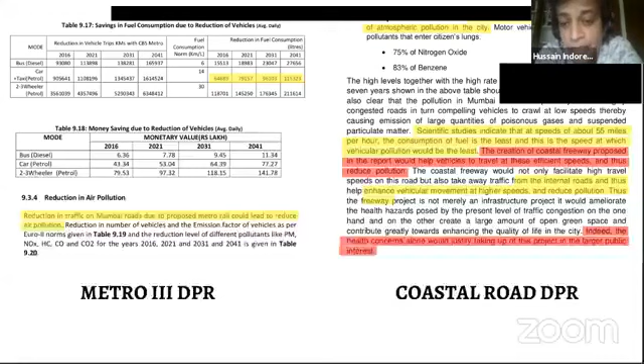Now, this is a very interesting comparison between two projects and their detailed project reports. The Metro 3 had a DPR and the Coastal Road had a DPR, and both were justified in terms of reducing pollution, but they had interesting differences.

The Metro project report claimed the Metro would reduce the number of cars on the road and therefore reduce air pollution. The Coastal Road DPR, on the other hand, said it would help cars move faster and therefore reduce pollution. In a sense, these are at cross purposes, because if the objective is to reduce cars, why would you want them to go faster?

Well, the truth of the matter is neither the metro nor the coastal road is actually going to affect car use very much. In fact, one reason metros have broad acceptance is because they do not affect the demand for cars or the use of cars. And if you think about it, that actually makes sense.

If you build a metro on an arterial road, there will be people who will move to the metro, but it will also clear up more road space for cars, which means that over time, the road space that is released will be taken over by car users, who will increase over time. So the metro doesn't necessarily reduce car use. In the short term, maybe it does, but in the long term, it does not.

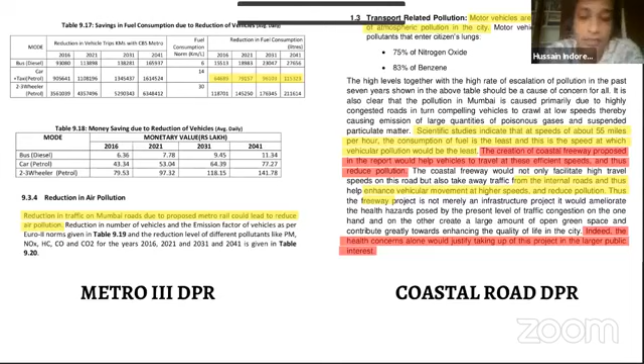The coastal road obviously has nothing to do with reducing car use. In fact, it induces traffic. But of course, official justifications are always made in a manner that suits the project proponents, and this is what they were doing in both of these.

So, just a little bit of an outline of the history of the metro system. Till the 1850s, was what we call the pre-mechanization era, where predominantly the mode of transport was walking or animal-based transport. If you think about cities at that time, they were fairly small. City form and city size was to a large extent an outcome of the main modes of transport that people used.

Between 1850 and 1920, new technologies started emerging, such as steam engine, rail, tram, bicycle, and this was just before the pneumatic tire was invented. So when you had to move heavy vehicles, rails were the best way of doing that, leading to the best or most comfortable mode of transport, because wheeled traffic would not be so comfortable.

Between 1920 and 1950 was what's called the metro, bus and car era, where you had the rise of these three modes of transport. Pneumatic tires came in, and these vehicles became much more comfortable, so buses and cars started growing in number. But at this point, metros were a little more comfortable and convenient compared to cars, which were not yet as comfortable as they are today.

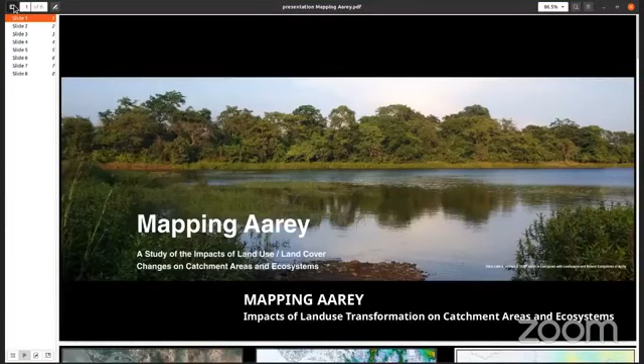Today's presentation is titled 'Towards an Ecological Planning Approach: Mapping Aarey for Conservation.' I'll be presenting a mapping report of Aarey which we did last year, undertaken as part of the KRVIA Research and Design Cell.

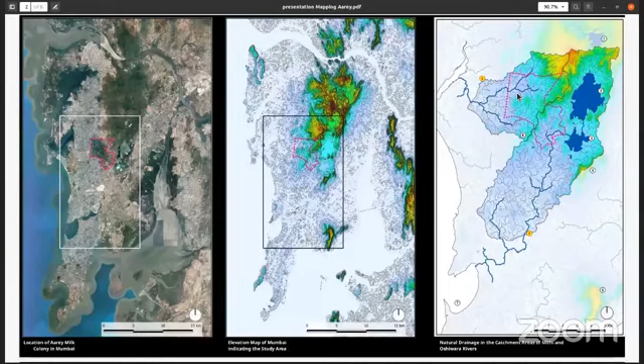These protected areas are either part of the national park or were earlier part of the NDZ, which Aarey was a part of. Aarey has therefore remained a low development zone with extensive forest cover and open areas, providing a sizable permeable area for rainwater infiltration and groundwater recharge. The 2018 land cover map shows some fragmentation of forest and natural vegetation in Aarey and surrounding areas; however, much of the vegetation and natural cover is still intact.

Opening up Aarey to a similar built-up intensity as the remaining catchment areas will impact both its ecological and biodiversity values and the various ecosystem services it provides for the city.

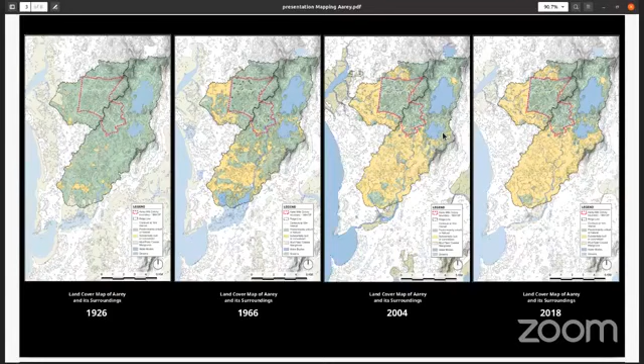Several experts have identified the ecological significance of Aarey and the various ecological services it provides. Experts have identified various habitats in the Aarey colony area, including scrub forest, seasonal freshwater marshes, hillocks with different degrees of vegetation cover, rocky outcrops, grassland, and scrub, which sustain diverse flora and fauna and make the area significant for its biodiversity.

This area is also contiguous with and serves as a buffer zone for the protected area of the Sanjay Gandhi National Park. The vegetation of Aarey, being contiguous with that of the national park, is also similar in composition.

Another important aspect contributing to its ecological significance is the ecological service of groundwater percolation that this area provides, which is important in catchments with natural vegetation cover. The Pranab Sen report recommends maintenance of geohydrological features which channelize rainwater to underground sources. Typically, in these catchment areas, 30 to 35% of water percolates into the ground and contributes to subsurface flow. The Madhav Chitale Committee report on the Mumbai floods also pointed out that soil type, vegetation cover, topographical features, and physical surface in the catchment play a key role in influencing runoff process.

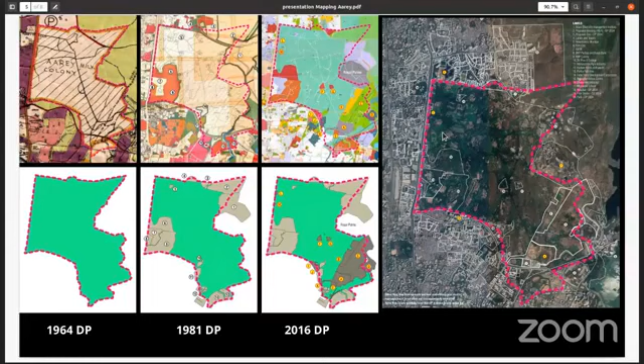It shows specific reservations such as the metro car shed, zoo, and rehabilitation and resettlement housing in the Mithi River catchment. These proposed reservations will involve substantial construction and concretization of land, increasing the volume of surface water runoff and reducing groundwater percolation. The map shows that many of these areas are still predominantly natural or unbuilt.

The recent draft notification now indicates that about 800 acres of Aarey has been proposed to be designated as a reserve forest. However, it is not clear whether the rehabilitation housing plot has been included or excluded from this notification. We should wait for the government to publish the maps to know for sure how exactly the CTS plots have been subdivided and which areas have been included in or excluded from the reserve forest designation.

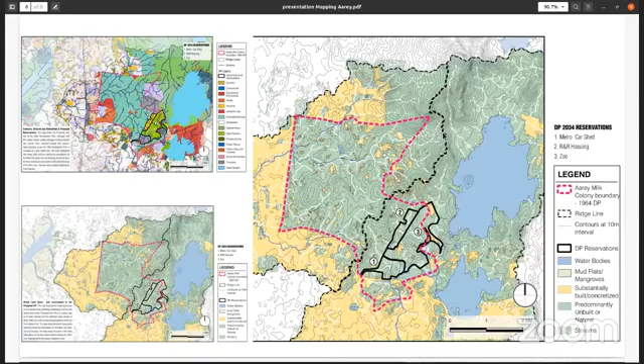This slide shows the concretization of catchment areas and how this will increase surface runoff, resulting in increased stream energy and risk of flooding in downstream areas. Some maps show areas that were flood prone and got flooded in earlier floods, downstream areas in the Mithi and Dahisar river catchments. The rivers in Mumbai also flow over a short distance from hilly terrain almost directly to the tidal region, which increases the possibility of flash floods.

The Pranab Sen committee report states that relatively minor disturbances near the origin of the river may result in enhanced erosion rates, fluctuations in hydrological regimes downstream, silt accumulation rates, and flooding in lowlands and natural recharge systems, all of which can result in serious ecological damage in surrounding areas.

Therefore, one needs to understand that there is a contiguity between ecological systems, and the impacts of development are not just felt locally, but also in other areas. So it's not just administrative boundaries that are important.

There was also another expert committee report to the Supreme Court in the case of MMRDA versus Jal Biradari and others. This also refers to how these comparatively steeper areas in the upper stretches of the river see sudden discharge of water downstream, making those areas prone to floods.

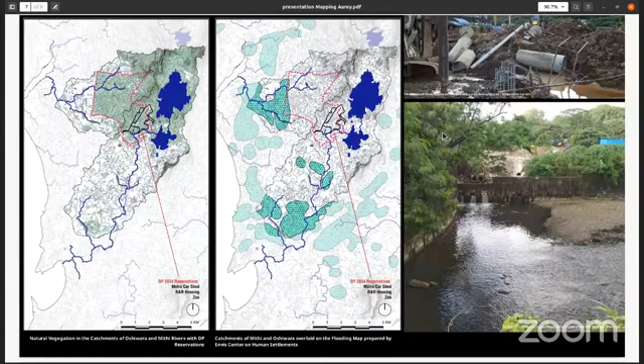So any kind of diversion, rerouting, or channelization due to construction activity affects surface and subsurface hydrology of the river. Proposed developments in Aarey are likely to impact not only the surrounding areas in Aarey, but also result in impacts further downstream.

Hence, I would like to conclude my presentation by arguing for an integrated ecological planning approach, as opposed to piecemeal conservation or development approaches. The first thing I would like to argue for is a comprehensive mapping and evaluation of ecological significance and socio-ecological values of the entire area of Aarey.

I would like to ask the question: is there a larger ecosystems perspective in the way Aarey is being conserved, and are various ecological values and ecosystem services being recognized and protected? To do this, we have to not only find the most appropriate legal and planning frameworks, but also ensure that these frameworks are effective.

The second point I would like to highlight is that there is a need for a comprehensive conservation plan for the entire area of Aarey and its protection under various legal frameworks. There is already a draft notification to notify parts of Aarey, largely uninhabited areas which have forest, as reserve forest.

In order to conserve and protect the remaining parts of Aarey in a comprehensive manner, various other frameworks could also be explored under other environmental laws. For instance, there are categories such as conservation reserves or community reserves under the Wildlife Protection Act, which could provide protection to forests and ecosystems in human-inhabited landscapes. There is also the framework of ecologically sensitive area under the Environment Protection Act.

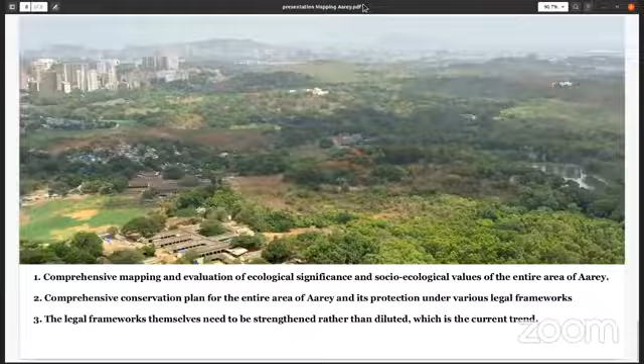Thank you, Shweta. That was a great comprehensive overview that you gave us of Aarey.

One has to understand that although we talk a lot about economy and Bombay being the economic capital, we also have to realize that we have several rivers passing through this city. There are hillocks, and the entire system is interconnected - the mangroves, the flooding. So if we tamper with the floodplains, even if you are far away at BKC, there will definitely be an impact. And if BKC gets affected, or any of our SEZs, or Chakala gets affected, there are businesses that get affected, and there's an economic cost to these things.

To handle all these scenarios, a lot of planning is needed. If you see all the developed countries, they invest a lot in planning, in designing infrastructure and public services. That is something where we've been going in a very slipshod and rushed manner.

The third speaker today is going to present to us an alternative planning perspective - what we call the Mumbai Metro Master Plan, a plan which is cost effective with better connectivity, and one which does not clutter our already congested arterial roads of Bombay.

The third speaker for today is Mr. Nitin Killawala. He's an award-winning architect and recipient of the prestigious JK Architect of the Year award, along with other national level awards, including the IID and IIA for excellence in architecture and interior design. Nitin is also a former academic council member at the School of Interior Design, CEPT University, Ahmedabad, and Kamla Raheja Vidyanidhi Institute of Architecture and Environmental Studies. More importantly, Nitin has been involved in the campaign for an integrated transport plan for Mumbai, and has been instrumental in revitalizing parks and public spaces around Mumbai. He has also been involved in monitoring, planning and execution of the metro project right from its inception in 2010, along with various citizen groups.

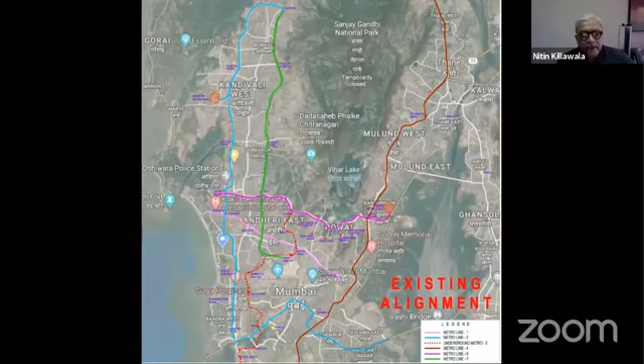So what is the existing alignment? Most viewers know about this, but briefly I'll run through it. We have one line which is the dotted line 3, as you can see over here, and then the extreme left blue line, which is line 2. Then we have line 7 on Western Express Highway. Then on the extreme right, line 4, which is the Thane-Wadala line. And then we have on JVLR, line 6, and line 1, which is already existing on JP Road and Andheri-Ghatkopar Road.

Now, if you look at this, as Hussain was mentioning, is this a metro alignment plan or our arterial road plan? The blue line, which is line 2, is the link road which goes up to SV Road and then takes a turn at BKC and then over to Sion-Panvel Road towards Mankhurd. The green line, line 7, is Western Express Highway. The brown line, line 4, is Eastern Express Highway, LBS Marg. These are all major arterial roads. And line 6 is the most congested, JVLR. So what is really important is these are the arterial roads.

As it is, we don't have enough road space, as mentioned again by Hussain, for public transport, especially buses. So these are all actually the bus routes where we are having metro, except for line 3, which goes zigzag underground. You'll be amazed to know this line connects 40 roads, whereas all our elevated routes are taking all the prime arterial routes.

Now what we are proposing is something very simple. We have line 3, which is sacrosanct. It connects very well as far as that line in isolation is concerned, connecting Colaba, Churchgate, CST, Bombay Central, BKC, Airport, and now going all the way up to Kanjurmarg.

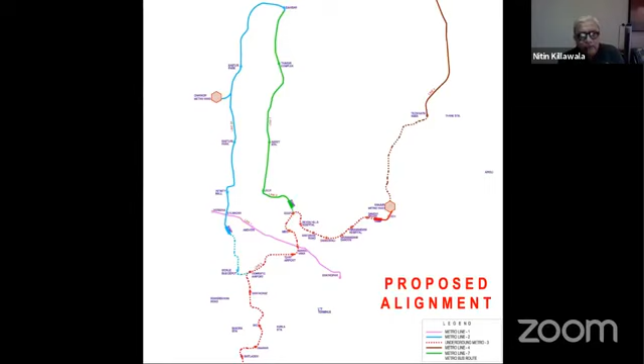Then we have line 6, which also connects on JVLR, as I mentioned. So what is more important is that actually there are 6 lines: line 2A, 2B, line 7, line 4, line 3, and line 6. Out of these 6 lines, in this plan we are trying to make just 4 lines out of this 6, and how it is done will come a little later.

Now, while designing this rerouting of these 4 lines, we are also taking care that enough bus routes are maintained. So between line 7, which is on Western Express Highway, and Link Road, which is line 2A, we could connect it at Kandivali, at Goregaon, from Oberoi Mall towards Infinity Mall, or from Lokhandwala complex to JVLR, and so on.

Even for line 1, which is Ghatkopar station, it ends at Ghatkopar station but there is no space to expand, so maybe between Ghatkopar and Tilak terminus, which is just about 2 kilometers. These are the ways in which we are trying to integrate metro with short routes of metro buses, what we call metro buses. There could even be a circular route, something already done in the Churchgate Fountain area.

Now, before coming to any change, there is always the first question of what about cost and time spent till date. So we are saying all this has been known to the planning authorities, known to the respective government, but somehow they never, unfortunately, listen to us.

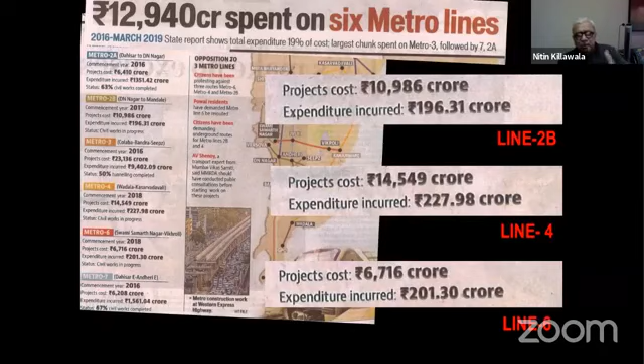Talking about line 3, fortunately, when I was looking at pictures of Aarey which Shweta just showed, I cannot believe there could have been a metro yard there. We are very fortunate that the metro yard has been shifted from Aarey to Kanjur. And we are not saying all this today for the first time.

In April 2012, when Metro 3 had just started, we had said to reject lines 2 and 3 in that form and requested they connect this line to Charkop. At that time line 2 was almost in the final stage of planning. Initially they didn't listen, but sometime in 13-14, during the government of Prithviraj Chavan, he considered our request and made this line 2 from Charkop to Mankhurd totally underground, with a 25,000 crore sanction at that time. But since 2014, everything got reversed.

Then sometime in '17, citizens suggested a Metro 3 alternative. What was that alternative? At that time the Aarey movement had really taken off, and it was an absolutely absurd idea to have a metro shed in a forest. So what we suggested was to take this line from SEEPZ towards the left, maybe through JVLR or Film City Road, but all underground, and then connect somewhere at line 2, near Goregaon.

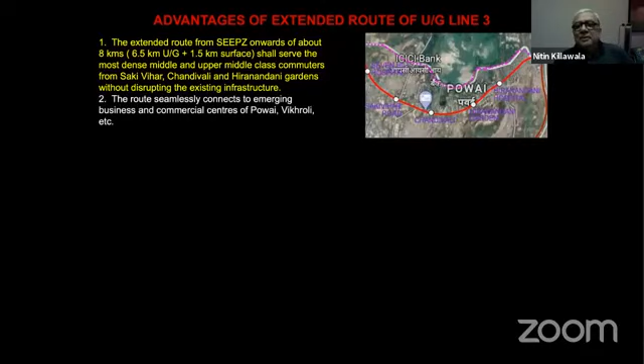Now, what are the advantages? Very quickly, this extended route passes through some major landmarks, and then it seamlessly connects to the business hubs of Powai, Vikhroli, etc. Then 2 major hospitals I just covered. So these are some of the real issues, and they are all very, very dense areas.

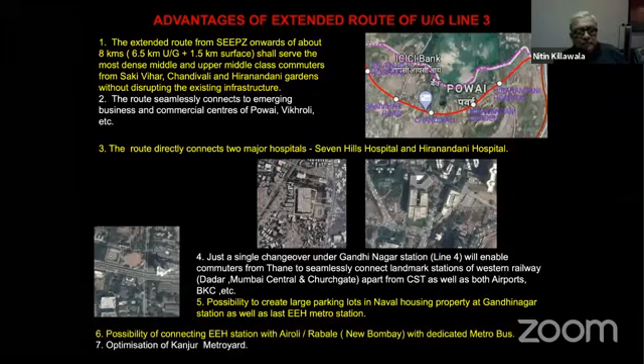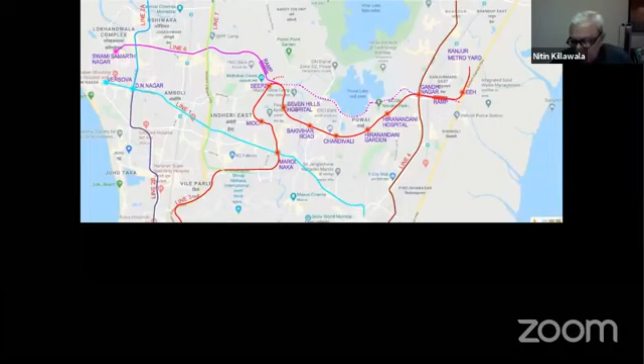Now, if we don't have line 6, there'll be a lot of questions. How can you just delete one line? But it's a tough decision, no doubt. But there are many advantages. You cannot ignore this scenario.

Now, where they are going to merge this line 3 with 6, there the alignment is almost at 25 meters. So you're coming up from almost 15 meters below ground to 25, 20 meters above ground. So this kind of ramp, this kind of connection itself is very cumbersome. Technologically, it may be possible, but these are not the best way to do it.

Similarly, when you look at the alignment in plan, there are many sharp turns and curves along the road. This necessitates provision of curves for metro alignment also. The radius of curves is kept at 125 meters to reduce property acquisition. Any elevated metro has to have land. You look at line 7 also - though it is on the highway, they are stuck mainly because there is no land available for entry-exits for stations, and so on.

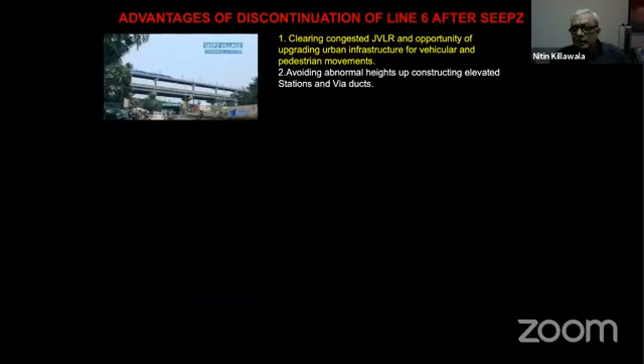Now, again, these are from MMRDA's report only. You can see this flyover and look at the viaduct. There is a 25-meter height.

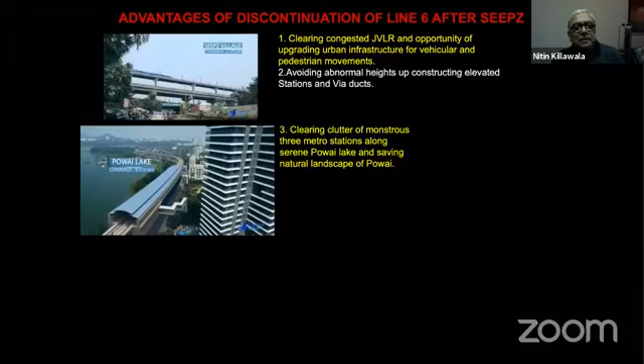Then there are 3 metro stations planned on this Powai Lake, near Powai Lake. And this is what we are going to see. Actually, this is still a better picture. When you see it at road level, nothing of this sort will be maintained. So these are all monstrous structures. Each elevated station is nothing less than 1 lakh square feet.

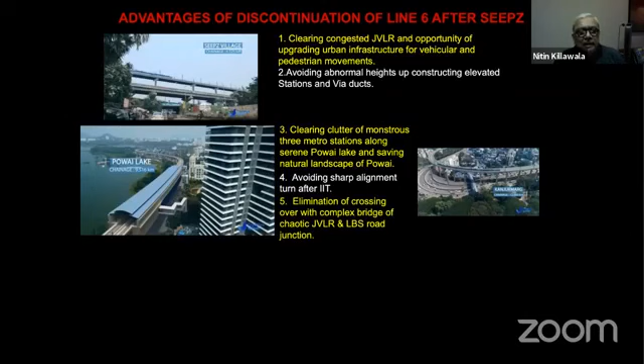Then we avoid sharp alignment also. These are all, as I said, just following the existing arterial roads, whether they are curved, whether they are undulated, and it is totally in a mess in that sense.

And then, of course, this Vikhroli rail track, there's already a flyover, which is choc-a-block all the time. There's hardly any space between the flyover and the adjoining building. And wherever there's railway, this is going to happen. You have stay bridges. Where is the cost for this? These are the most expensive structures, and it takes a lot of time.

And that's why all our elevated metro projects are going beyond schedule. Line 3 is slightly expensive, but they have completed 80% of the tunneling work, whereas all these lines are going much, much behind schedule.

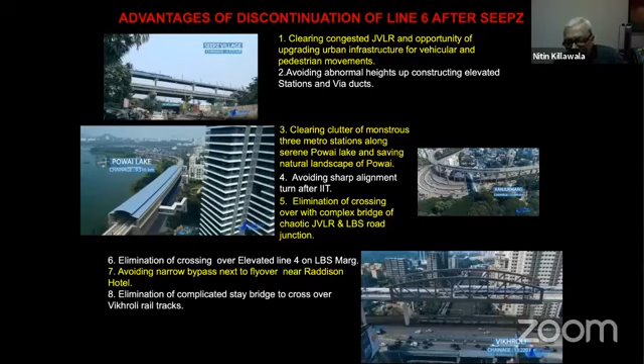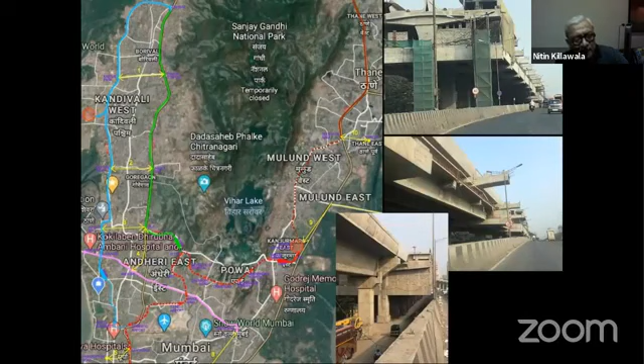So what our proposal is, you disconnect this line from JVLR junction to airport, which is about 6.5 kilometers, but turn it on the left side, and we already have, by default, some piers come up for line 6. Use that and stop this line at SEEPZ station. So connectivity is there with line 3.

In any case, right now it is at T2 airport. You will have connectivity at SEEPZ lines. So we avoid this 7 kilometers of additional elevated metro on Western Express Highway.

Now the same line becomes line 2A on the other side of the railways. So these are the points which I was saying. We'll be connecting to existing metro stations which are already planned, whether we like it or not. That is a fait accompli, and we take it in our stride.

So from Kasturi Park station to Thakur complex, the route is not more than 2 to 2.5 kilometers, something like that. So very, very short routes. Then from Oberoi Mall Junction to Infinity Mall Junction, from Lokhandwala to JVLR junction, from JVLR to Andheri station also. So there's fantastic connectivity which you get in the process.

And line 2, what we are proposing, line 2A is up to DN Nagar. We again disconnect line 2B for the time being, but connect line 2A, or you extend it up to the domestic airport.

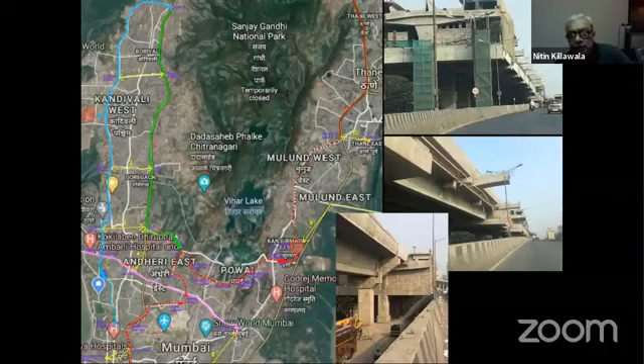Now, why I'm saying this: near Juhu airport, there is a height restriction, and the height restriction is not just a few meters. These are the reports, and in fact, a petition has been filed against this order that they are going ahead with the work, in spite of it being pointed out by AAI officials that the permitted top level at Vile Parle location is nil, which is zero height. In spite of that, they are going ahead with the work.

And SV Road is again one of the most important arterial roads, which goes via JVPD to Link Road. Everywhere you will have these elevated structures at a kilometer distance. So this is Mitibai Junction. If we had elevated metro, this is how it would look. Fortunately, till now, nothing has been done except a few columns. So we can still review it and redo it.

On SV Road, Santacruz, Khar, Bandra, that stretch has beautiful trees. And if we have elevated metro, it would be like this. So these are the hardcore realities. And as I said, we have spent only 1.5 to 2% of the cost. And some of the cost can still be salvaged.

But let us review it. We don't need 6 metro lines. Even Delhi has got 8 metro lines spread over 20 years of construction. And in elevated metro, if you have 6 metro lines, you need 6 yards. If you have 8 metro lines, you need 8 yards. You cannot really optimize. And lastly, about line 4, which comes from Kasarvadavali to Wadala.

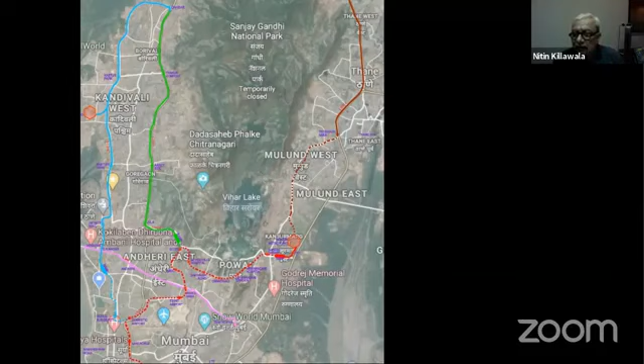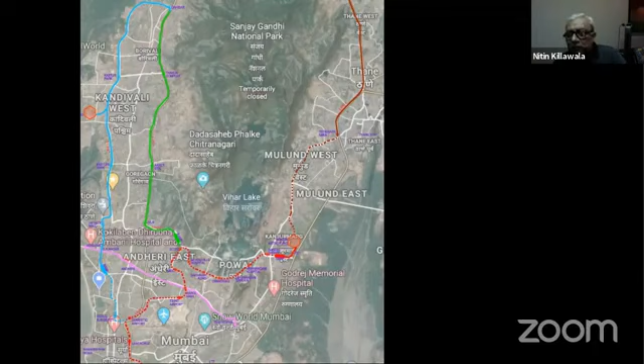So what could be done from Teen Hath Naka to Kanjur Yard? This Kanjur Yard is 100 hectares, it's a huge land. And there is a possibility of getting some more land because there are some encroachments, etc. over there, so we can even make this yard much more optimized. And these are the junctions I'm talking about: Teen Hath Junction and Amar Mahal Junction.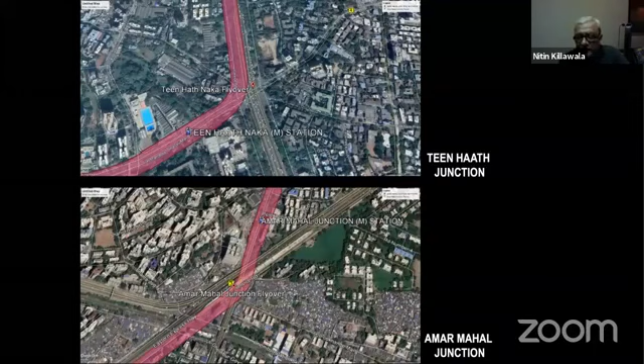Now, Amar Mahal Junction is like a madhouse in any case. So on top of that, this pink line is the metro alignment. So if we have to have underground, if not today, if you don't have money, maybe you can phase it out. Because what is happening after this junction, when you look at Kurla, Wadala, etc., they are more or less part of central Mumbai. They already have the opportunity, or the facility of getting a harbour line, central railway, Dadar, that's all connected with Western Railway. They're not very large distance, and they're not too far from the main city, or not too far from even Thane.

So it will have that metro, but you do it in second phase. So what all, just to summarize, what I'm saying is how efficient we can make the route. For example, line 7, which will have Dahisar to Kolaba connectivity, if we follow this plan, with just one interchange at SEEPZ station, you can go there. Then another option, Dahisar to Thane or Kasarvadavali, with 2 interchanges, one at SEEPZ and other one at Kanjur Marg.

You can connect easily. Then for line 2 and 2B, it was always line 2, but for some reason, this government, or rather former government, made it into two parts, 2 and 2B. So for me, line is only one, line 2. So Dahisar to Colaba, via domestic airport, you get line 3 and you go to Colaba with only one interchange at domestic airport. And then Dahisar to even Thane, with again two interchanges, one at domestic airport, other one at Kanjurmarg. So you look at the possibility of connectivity.

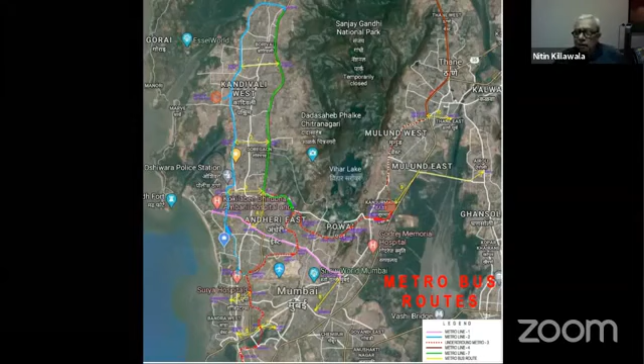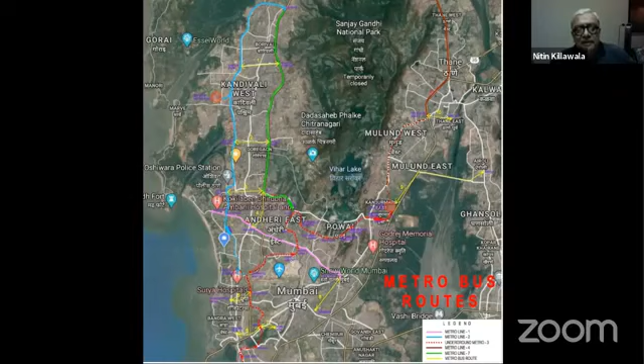So what we are trying to do is we are deleting some lines, so we'll get credit for whatever cost we save on that, and we spend wisely. So roughly, I'll not go into the detail of this, but the new alignment which I just mentioned to you is coming to about 23.5 kilometers of additional underground line, including for line 3 extension, and then 3 kilometers elevated line. So it is easily doable and will be able to finish in time.

Cost is something which can be negotiated, which we can work out. And these are, we have to take care of, cost benefit. These metro lines are not necessarily will be largely used by you and me, but our children's grandchildren. So we have to think in that perspective. And then look at what is happening all over the world.

Everyone has seen this, and these are all underground. And look at the connectivity. You are creating an entire weaving, another parallel city underground. Now, I'm not suggesting that. Whatever has happened has happened. But let us salvage the situation, which is doable. Let us not repeat the mistake.

We have made a blunder in designing even monorail. What has happened? The project is scrapped. Even skywalks, we have spent 700 crores. 50 out of 70 skywalks are shut. But they ruined our arterial roads, our streets, everything.

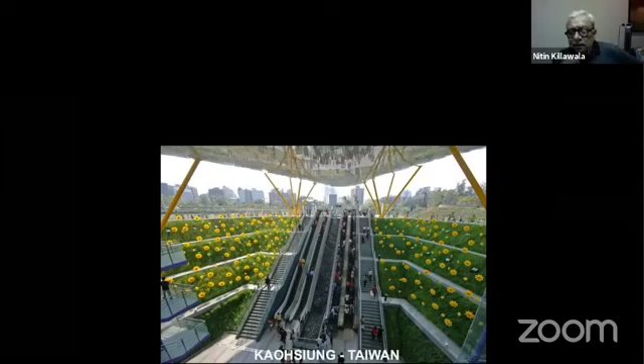And then why can't we have a vision where let's celebrate even underground metro or any metro station as some kind of public space. Chandni Chowk in Delhi was a dying neighborhood. Just because of underground metro under Chandni Chowk, the entire area got revamped. And at road level, it just occupies some kind of footpath space for entering.

So just to summarize, I'll just give 4 or 5 points of whatever I've discussed about. We are proposing 4 lines which will merge out of existing 6 under construction. And then there are only 2 metro yards at 2 edges, one at Charkop, other one at Kanjur, which is already planned.

Then 50 kilometers of major arterial roads will be regained by not doing elevated metros over there, for better bus routes and other green parameters like cycling tracks, pedestrianization, greenery, whatever. So all that scope is there, at least to upgrade those roads. Then saving the pristine Aarey stretch, which I talked about, and the Powai Lake promenade, that will be kept intact.

And then introduction of at least 10 to 12 metro bus routes. I forgot to mention about Kanjur Marg. The land is so big that we can have a huge parking hub, car parking. So people can come from Rabale, Airoli, which is 5 to 6 kilometers away, and they can get options to go to various directions in the mainland city.

And then avoiding complex and most expensive bridges, rail bridges or metro bridges, which we have to construct as per the present plan, crossing over line 2A, 7, 6, and 4. All that will be eliminated. There are 2 rail tracks, one at Jogeshwari, other one at Vikhroli, that will be eliminated.

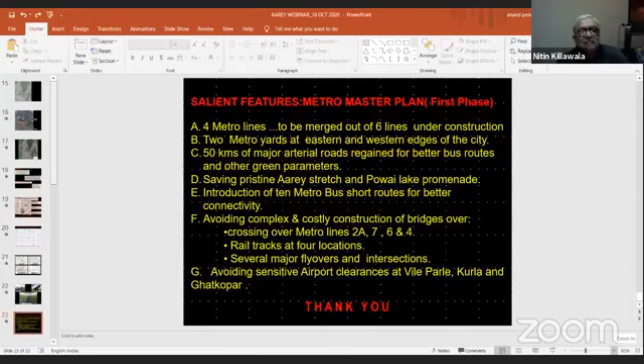And then several major flyovers and intersections, they are also very complex. Right now what we see, bahut kaam ho gaya, that work has happened, and that is the most simple work they have done. In the middle of the road, they have just done the columns.

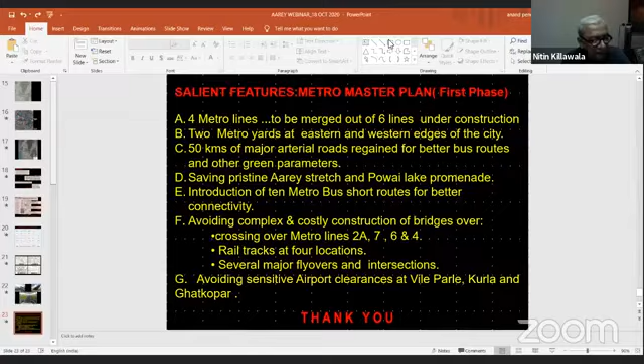And lastly, avoiding sensitive clearances like airport, even fire clearances. Everything is being done in a very shoddy manner.

If you don't find the 200-foot wide Western Express Highway enough, make it 230 feet wide by one circular. If you have some planning issues of DCR, then make it SPA, so the entire metro alignment across Mumbai is SPA, Special Planning Authority. If you don't have fire permission, debar from getting fire permission. So this is not the way, by knee-jerk reaction, you make a project.

And even elevated metro is also not cheap, it is also very expensive. So the idea is to first put metro in the right perspective, and then connect it with buses, connect it with existing stations, connect it with existing bus depots.

Today, actually, we are selling our bus depots. Look at Mahim bus depot, look at Kurla bus depot, they're all sold, Jogeshwari bus depot. They're large lands and they are all scattered all around. So we can even connect these major hubs.

I think I have overshot my time, but then if there's any questions, thank you.

No, but Nitin, what you've covered is very, very important. I think it sort of brought together what Hussain was talking about, how in a very congested and human-dominated landscape like Bombay, we need to consider the low cost of transportation and mobility. We have to connect access at various places.